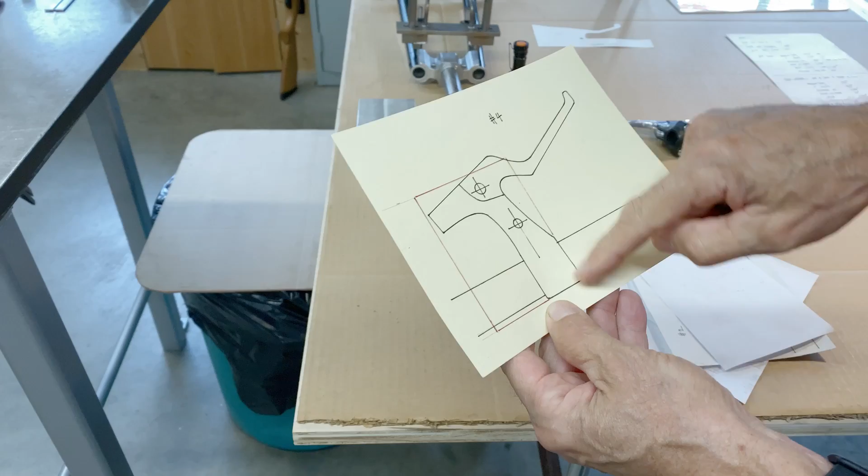I settled on number 4. If you zoom in here a little bit, you can see there are 2 parts. This is known as the perch, and this is the lever. I've got an outline in red because I've got the perch inside. So that's the size of the aluminum I'm going to be starting with. I have 2, I have to make a right and a left.

I've made lots of things, but I've never made a lever. So the first step is to make the hole that holds the bar, the handlebar. We're going to put this in the mill. First I don't want to drill down and bore into a blind hole. So what I'm going to do is go to the bandsaw and cut out a notch here, so that when I bore down, at least the chips can escape out the side at the bottom.

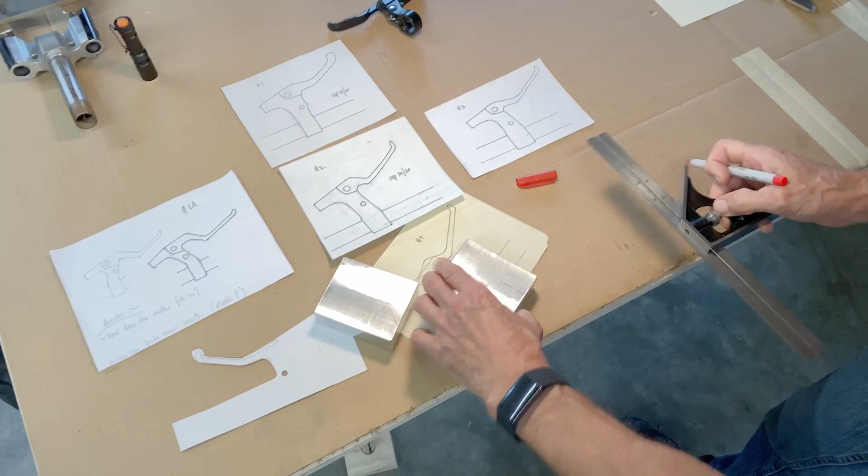That's the first step. In this process, I have to hold this. All these steps I'm going to be doing, I always have to think, how can I hold it? That's why I don't cut the shape out right away, because then I've got no way to hold it. It's always crucial, how do you hold it.

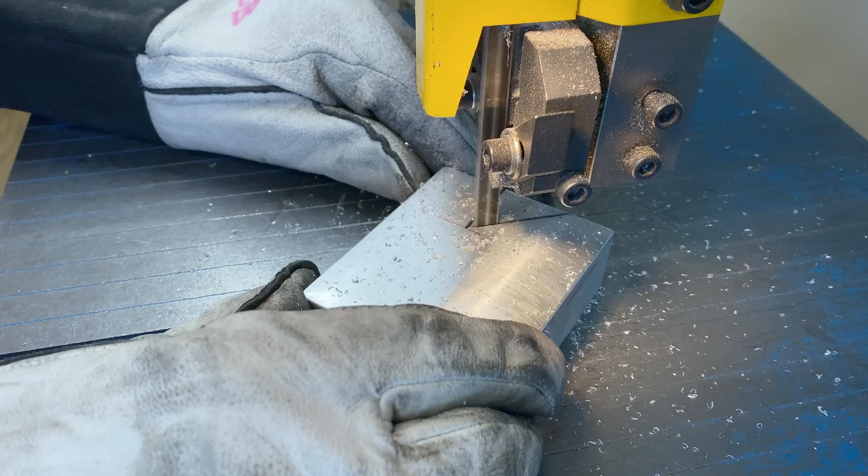In machine shop terms, okay, let's go to the bandsaw, we're going to cut those notches out. I didn't mention it, but this is 6061, and these 2 pieces of aluminum, yesterday they cost me $15.

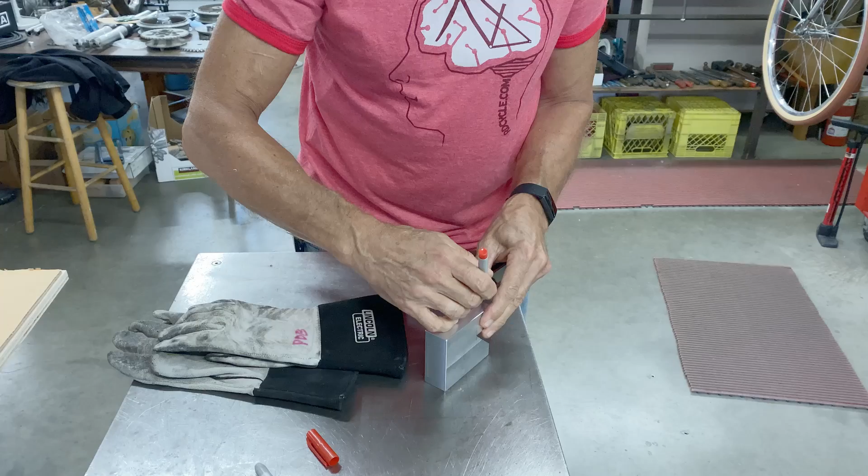I'm going to use a digital readout so I can center it, but this just lets me know how close I am, because it's always possible to make a mistake. I got a few operations to do here. So what I'm going to do is set this up in the mill vise, and locate it against this at the end of the vise, and then I can swap them out because each of these pieces is identical in size. So I can drill the hole, swap it out, I'll drill the next size hole. Then I don't have to keep changing drills as I go through, just doing one at a time.

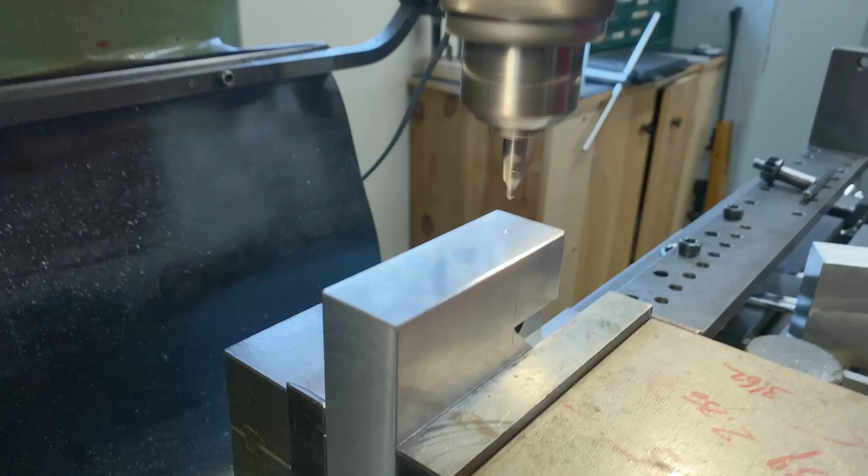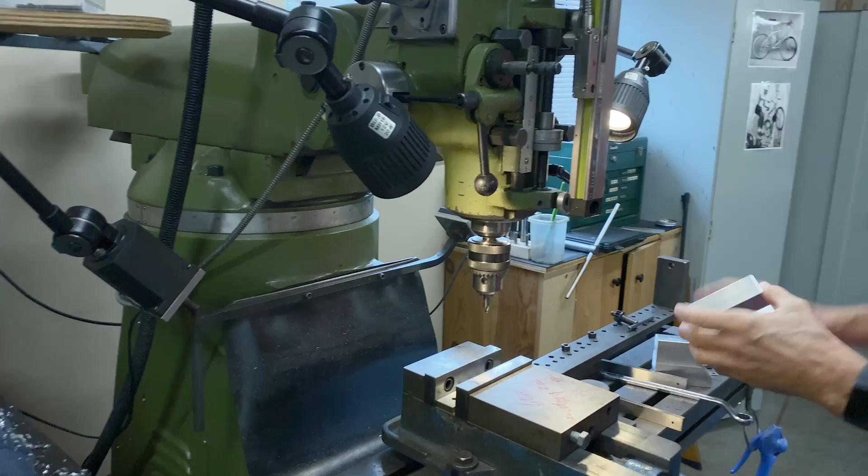Looks like it's very close, well, close to my felt pen marks. So now I can just swap parts back and forth, because when I do it like this, I know it's going to be right where the other one was.

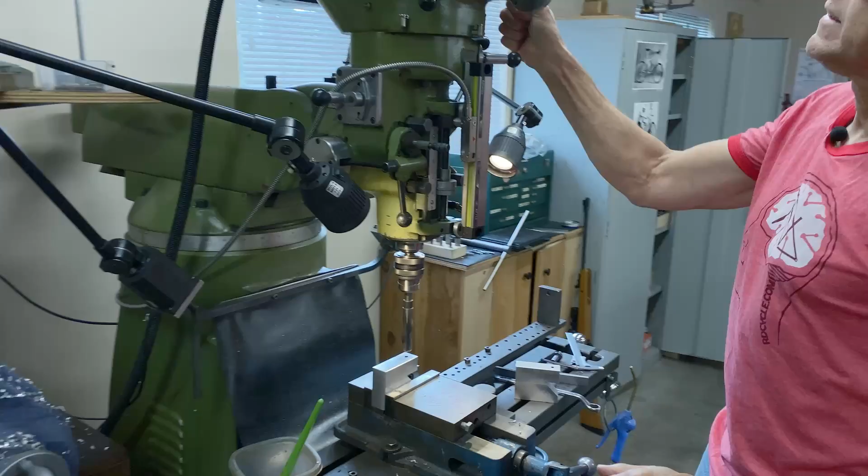We'll have to slow it down a bit because this is a larger drill. That's the rule: a small drill bit, you go very fast; a larger drill bit, you go slower. I'm going to try 800. Okay, 750, let's see what happens here. Oh yeah, that's working. There we go, that worked fine.

That's my boring bar, it's a single point tool with a carbide insert. You've got the vernier scale there, you can adjust it back and forth. That's how you set the size of the hole, because the hole has to be accurate, otherwise the handlebar won't go in, or it'll be a sloppy fit.

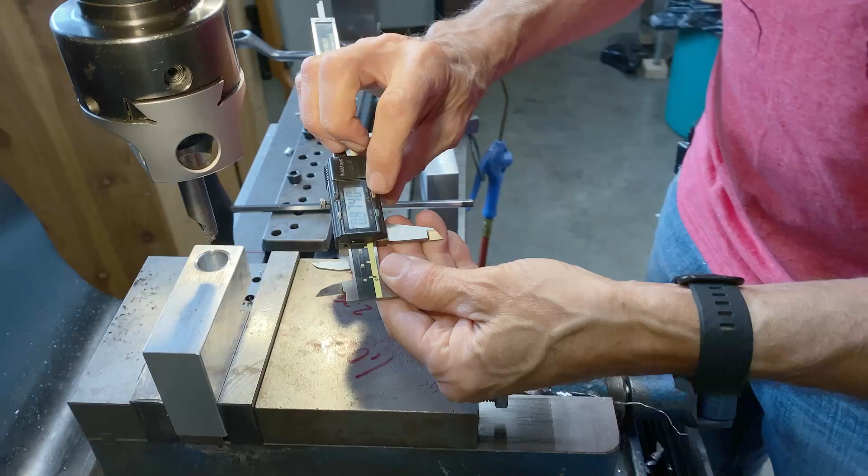Yeah, that's all I want to do. So I'm going to set my vernier to 875. There you go, 874. Zero it, and we'll see where I'm at here. Okay, so it looks like about 60 thou small, which is good. That's 30 thou, so I'm going to take a cut.

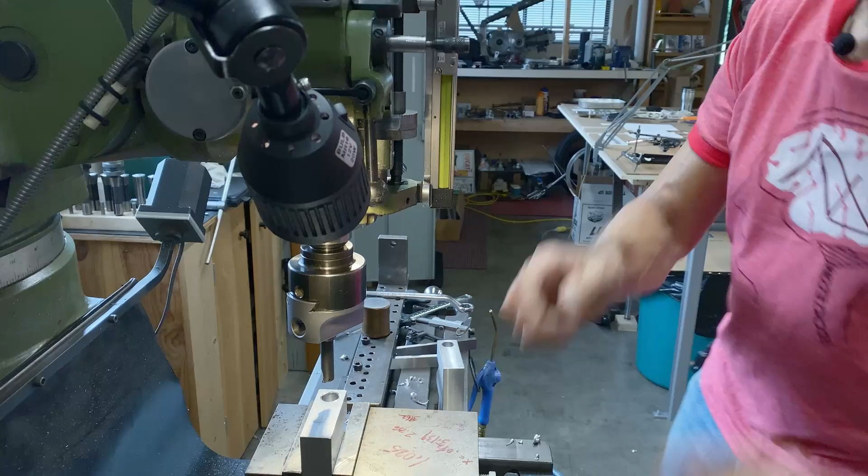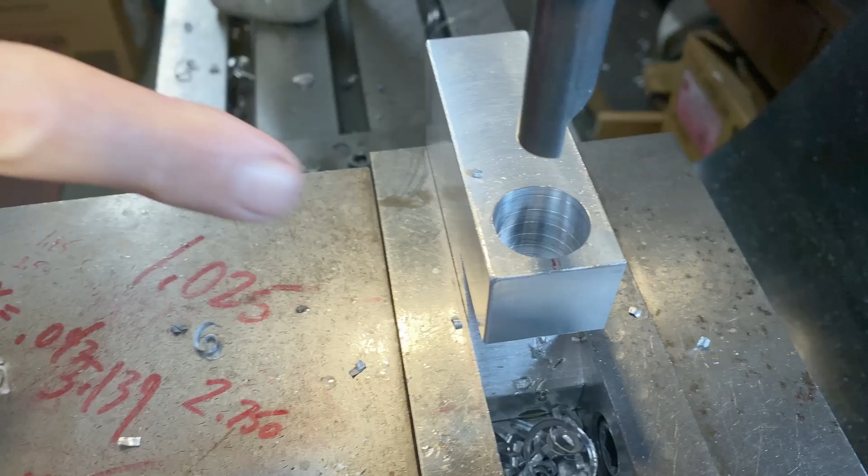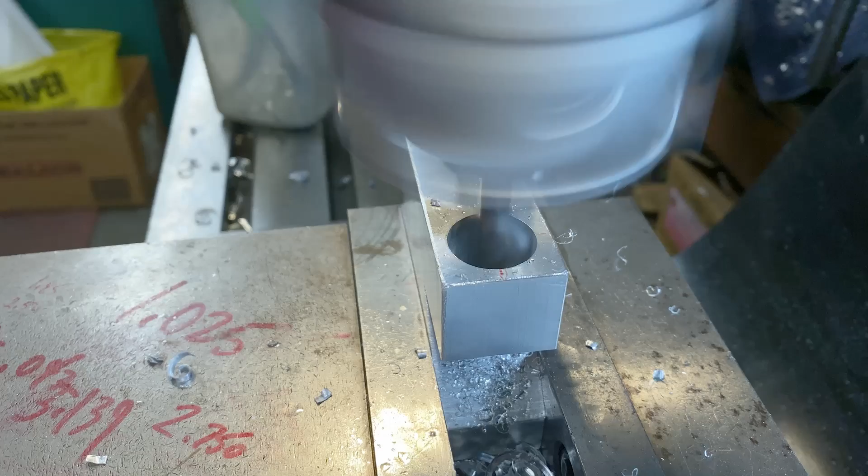Yeah, you can see the chips come through the hole. Okay, see the spiral inside there? If I take one more cut and don't move the tool, I bet it takes a couple thou out. So I'm just going to do that quickly, just taking a very small cut. So once I measure that, then I'll know how much to move my tool. It's a smoother cut now, you can see the difference, because it's taking a very small amount.

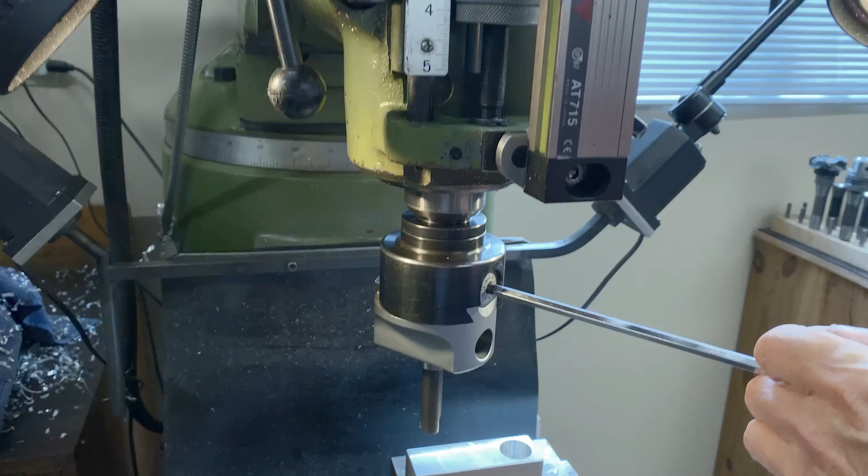I got my telescoping gauge, so I put it in, lock it, move over center, then measure. Okay, it's 853, so 22 thou, that's how much more has to come out. I'm going to go 20 because I can always take off 2 more thou. So I moved it from the 60 to the 80.

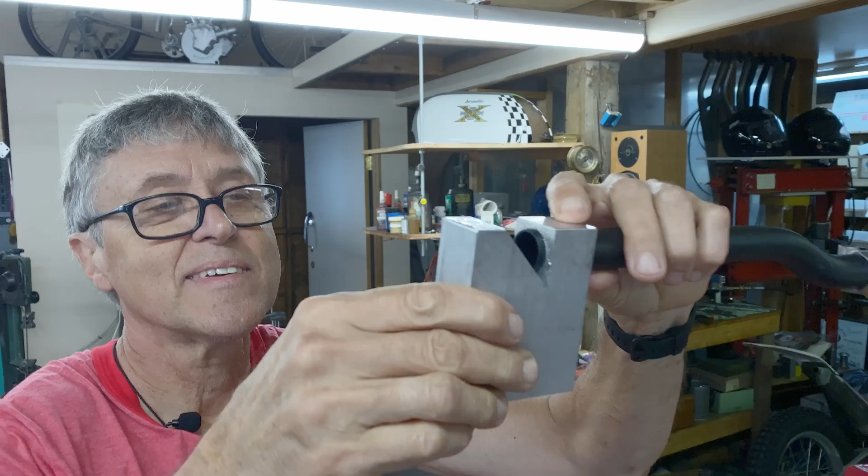It just goes on there. There you go. Maybe a little bit of slop, but that's okay. Hard to take the burr off the inside. That'll happen later.

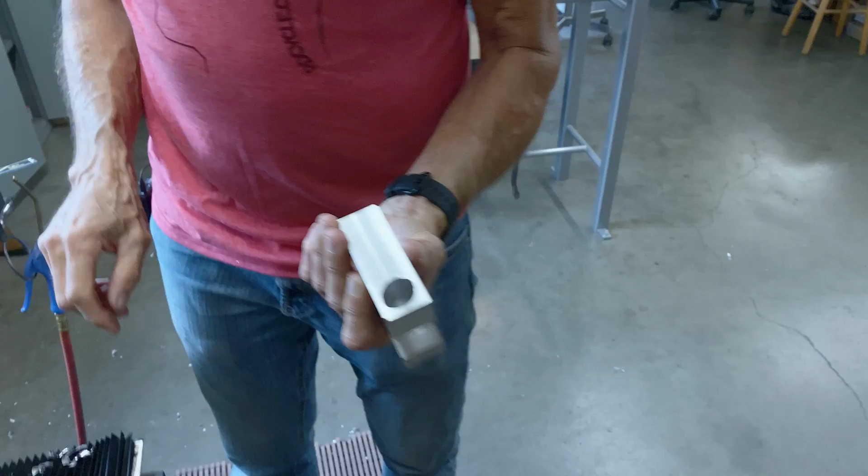Okay, so that's the first part of the operation done. I think what I want to do next is to drill and tap the hole for the adjuster screw to go in here.

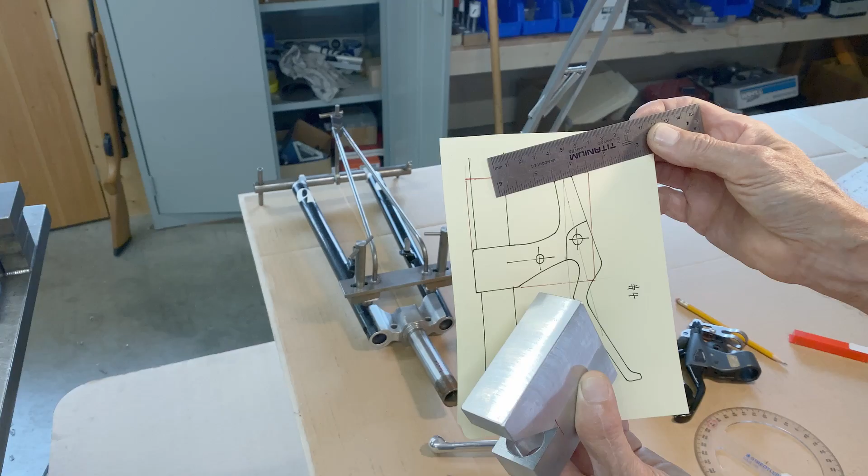There's my zero, it's 11 degrees. I've got to hold this in the vise at 11 degrees, and I got to mill a flat. That's going to be that flat right there, because I can't drill a hole if it's at an angle, because the drill wants to wander. So I have to machine that flat. So I think that's the first step, is to mark this at 11 degrees and then hold it in the vise.

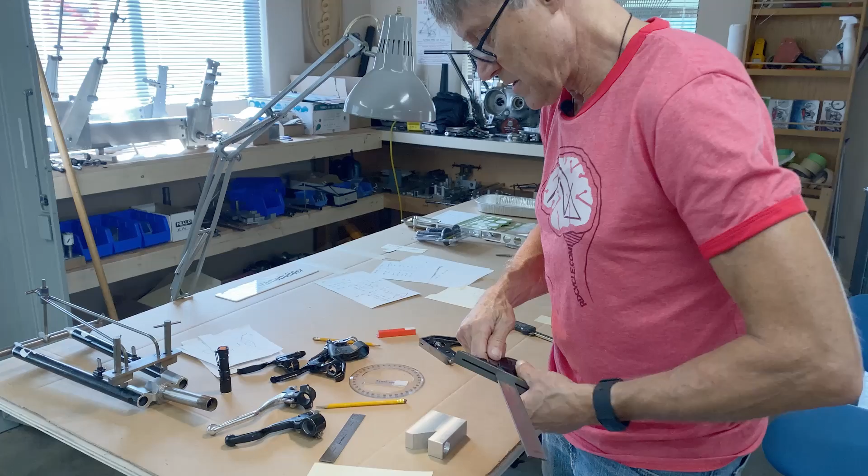Like I said, I've never made a lever before, so this is new for me. So I'm learning the process. So I'm going to eyeball it with that red felt pen.

The flat has to come past here, so that's about where I want the end mill to go to, or the cutter. So it ended up a little higher than I thought. So what you can do for that, if it ends up higher, I take a piece of flat bar. See that? I put the flat bar on top of the vise jaw, and now that lines up quite nicely.

This is my fly cutter. It's got carbide inserts, 5 of them. And I usually spin this at about 1,000 RPM, something like that.

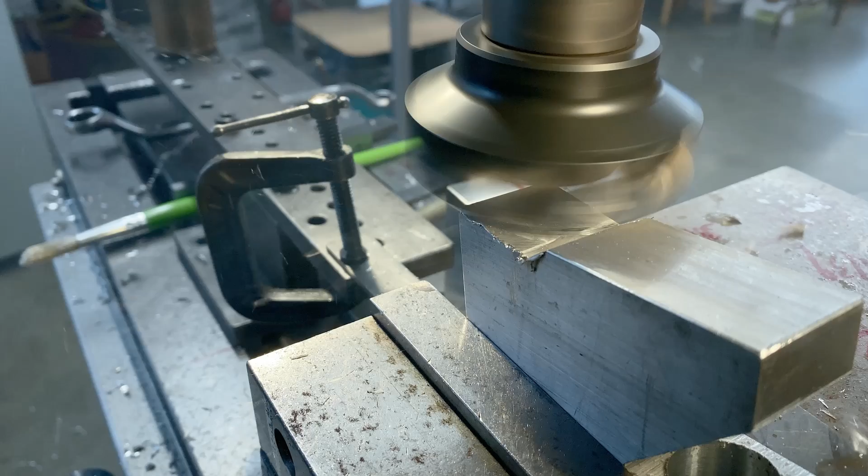So what I need to do now is, I've got the center, there's the center right there. So I need to mark the center on the piece.

All the CNC guys are probably just cringing right now. So that's my center right there. That's where I want to, I've got to drill and tap right there.

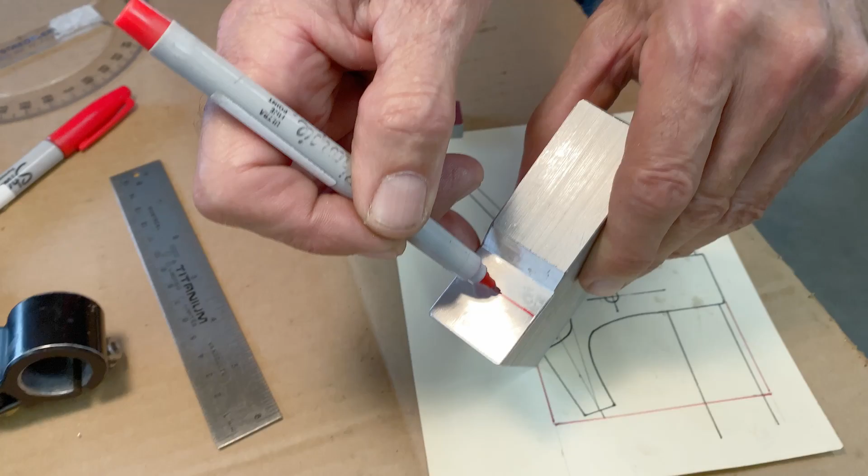It's already centered on the mill because I got my Y zeroed, so I just need to move the X so it's in line. But maybe I want to notch this out too, so I'm not going into a blind hole. So I'm going to hacksaw.

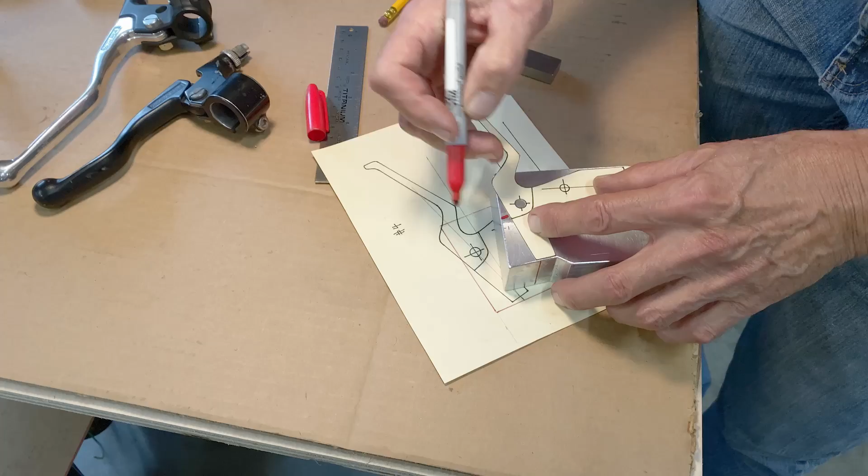There's the hole. I'm going to hacksaw like that.

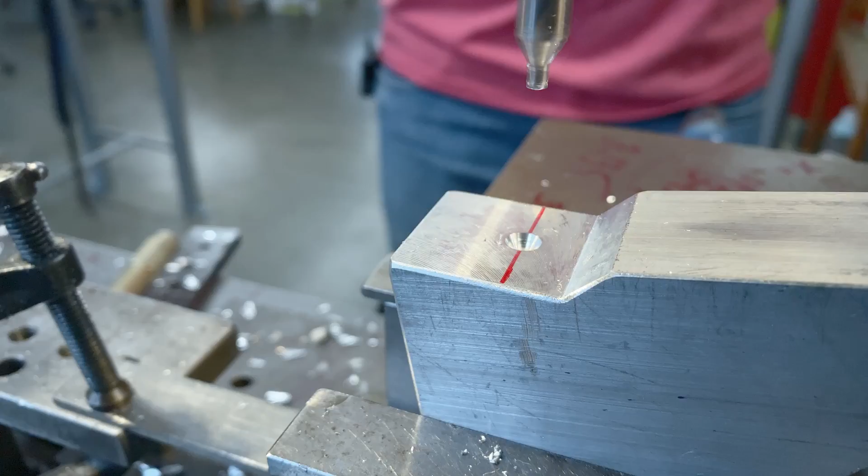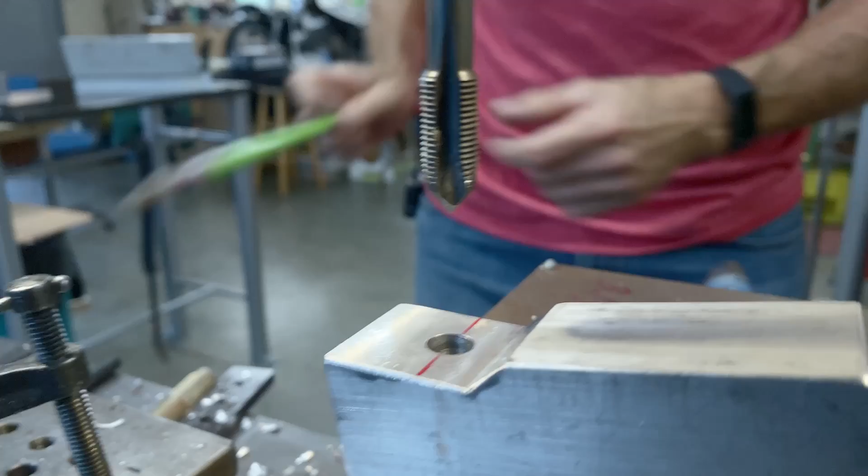There we go. So I'm going to start the tap and then I'm going to switch it off and I'll finish it by hand. There we go.

Okay, those are the chips coming out of the tap because it's a spiral point tap and it always forces the chips down. And that's another reason that I didn't want to have a blind hole, because this way I can get the tap to go all the way down and not get bound up with a whole bunch of chips.

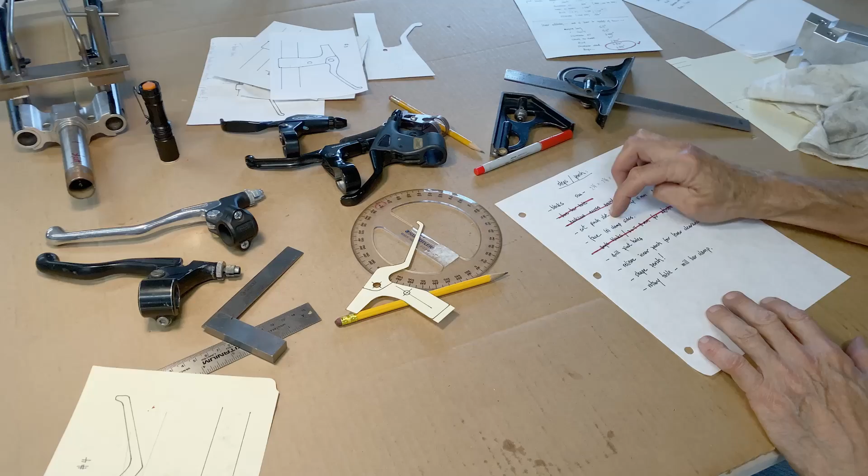There we go. I think what we'll do now is to cut the pivot, is to drill the pivot hole. I'm going to show you this.

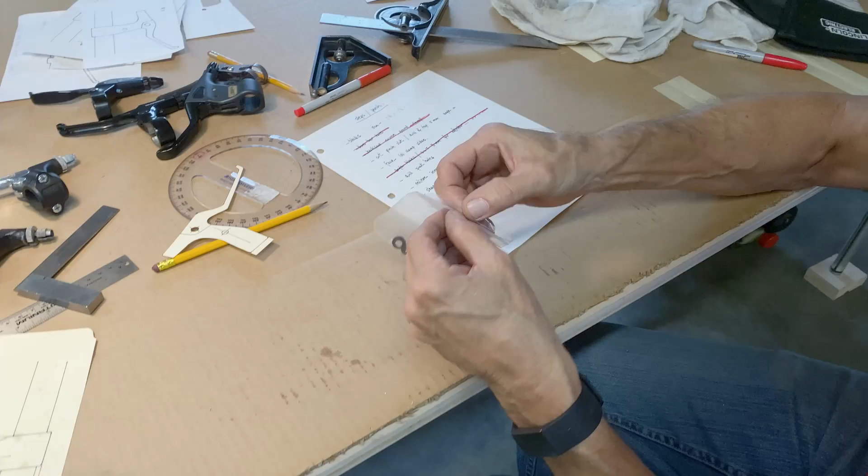I've got some little pivot, I call them bearings. It's like a little nylon bearing, and this comes out of a trials bike. This is the brake lever on a trials bike that I own, well, an old lever, and you see how the insert is pressed in.

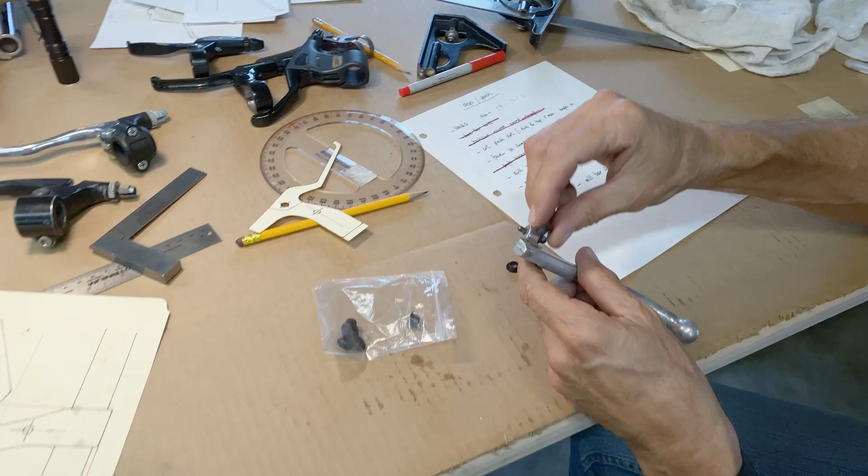So what's going to happen is these little inserts are going to go inside the perch. They're going to go on each side and get pressed in, and then there'll be a little shaft that goes into the lever. That's going to be the bearing. That's a nice little way of doing it.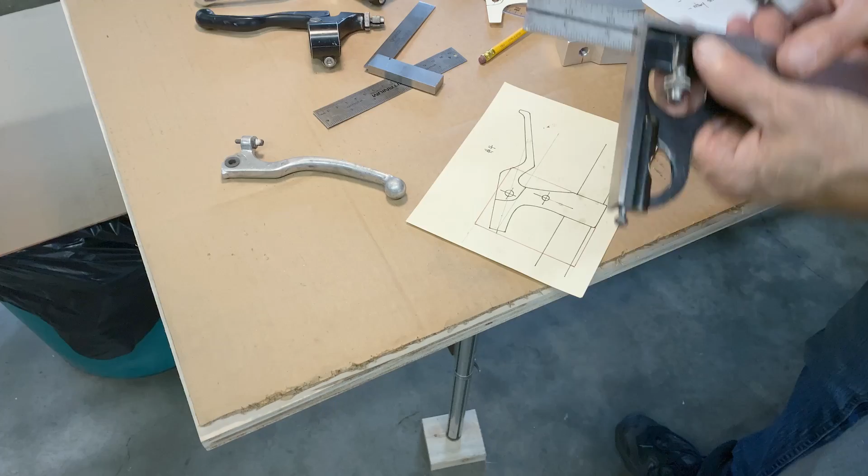So I'm going to measure off of this here, and how you set this up, I just do that. So that's going to go right about there. I just have to mark one, because after I've marked one, the other one is a no-brainer. Like that.

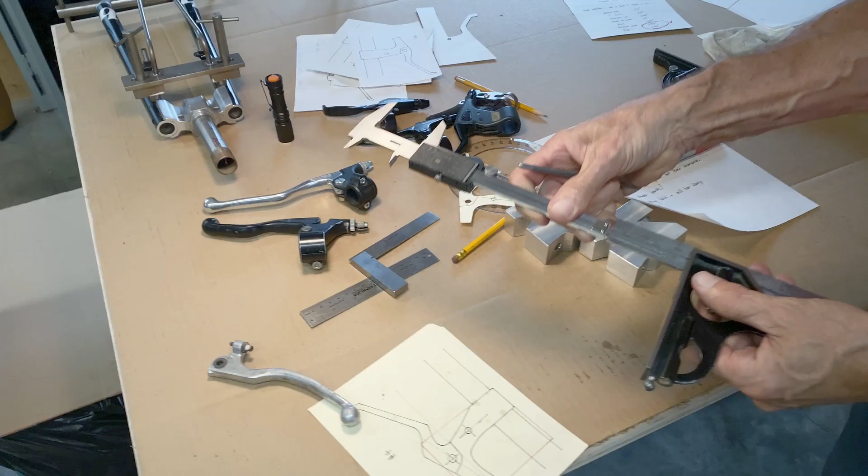That's my center on the pivot, or for the pivot. So I'll put that into the vise, I'll drill through, and then I just put in this one here, and it automatically goes to the same spot.

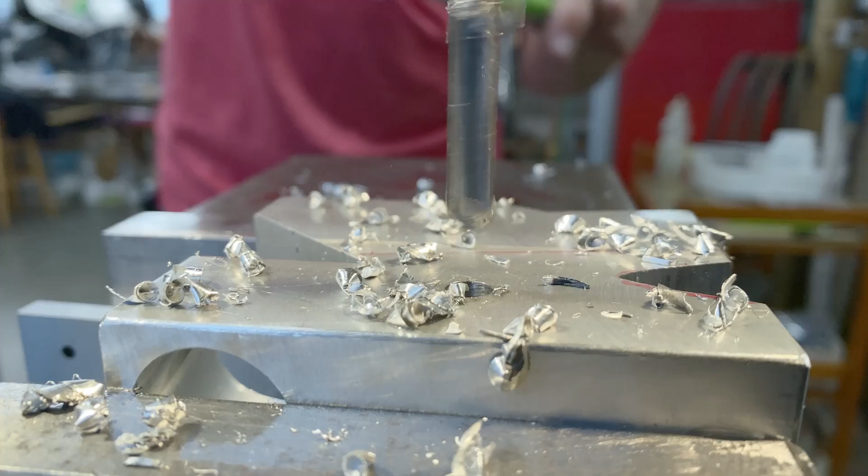So we've got to cut the slot now, and the slot you can see on these ones how it comes in at an angle. Can you see that? That's basically what I want to do.

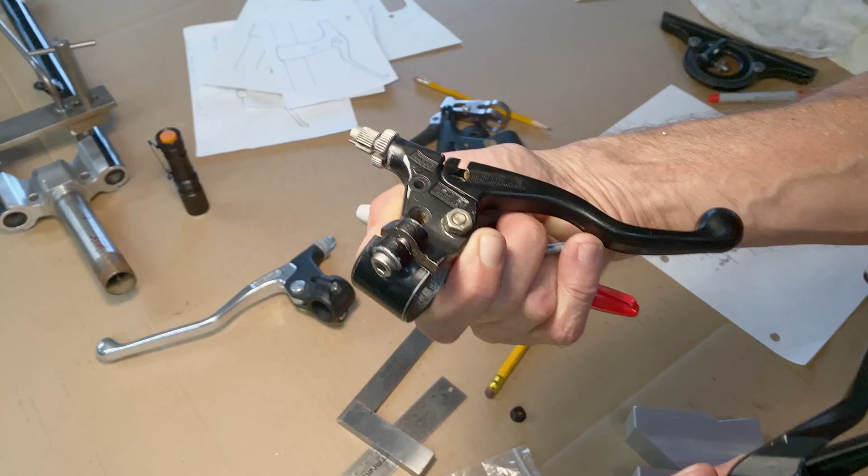I don't like the width of these slots. There's a lot of things on these levers that I don't like. I know I'm fussy. You see how wide it is there? This one is narrower, but I've got a little slotting saw that's even narrower than this. It doesn't have to be that wide. Look at that. Look how wide the motorcycle one is. It's huge. It's got to be at least 1/8 of an inch.

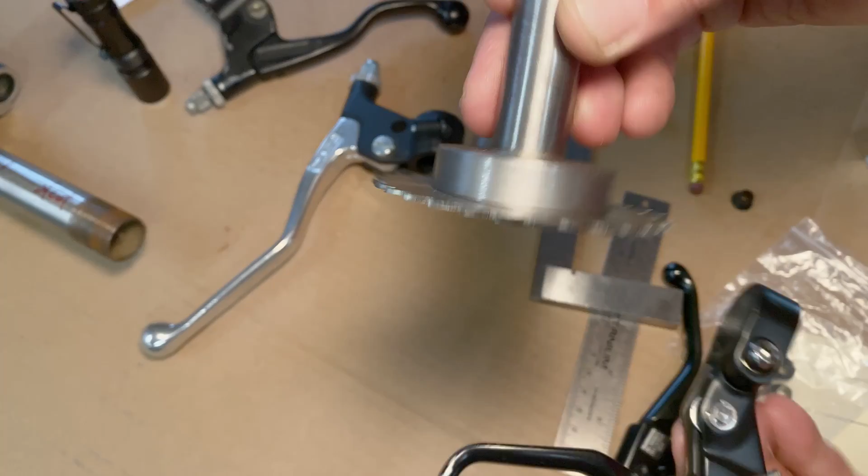So what I've got, I'm going to see if this works. See how skinny that slotting saw is? When it goes into here, it's even got a little bit of a wiggle there. So let's see, and this one's going to work quite nicely.

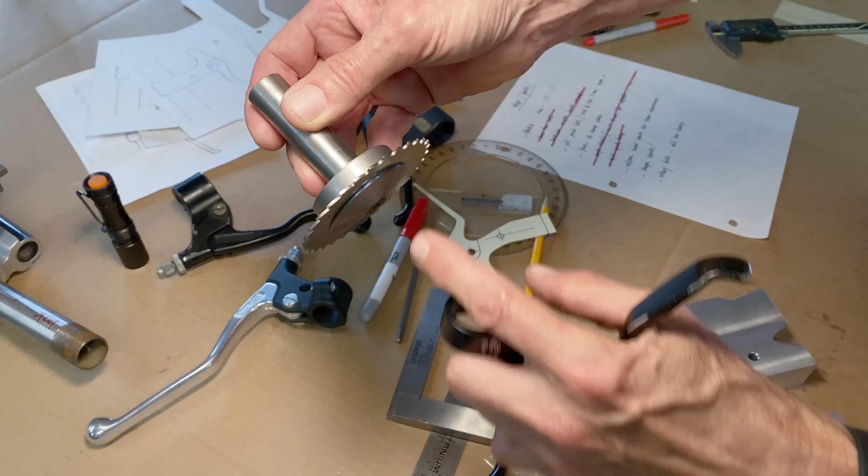This is a custom holder that I made for a job years ago. See how it goes in? You got to have space here. If you've got a big nut coming down there, it won't go in there. So this might be the trick.

I need to set this up in the mill so that I get this the right distance from the handlebar out to the center of the pinch bolt.

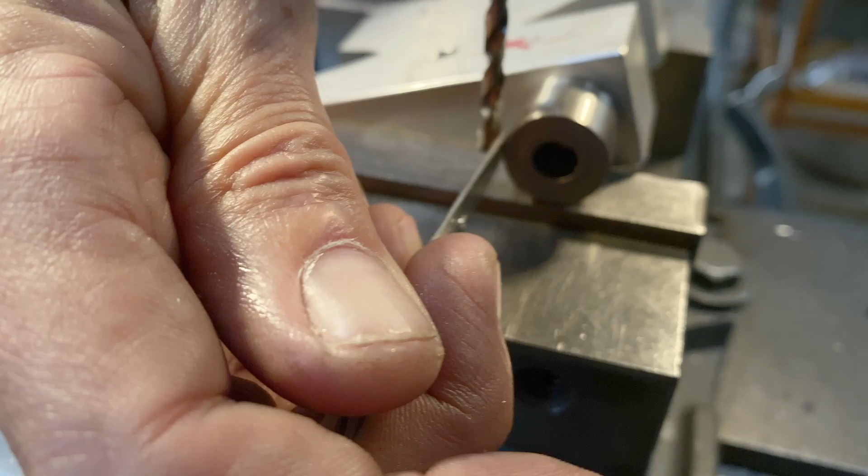So there's the center line. Okay, now I'll put this back in and show you why this piece is in there. If I put a 5mm drill in, that's the size of the Allen screw, and this is the tap drill. So if I put this in, that's what I'm looking for - I'm looking for that space. So I can make it a little less. I can move this a little bit. That'll be fine, as long as there's a little bit of clearance.

So I'm going to lock the table there. What I want to do here is only go down a little bit, and I might leave a tiny little flat on here on the low side. That shows that I haven't taken off too much.

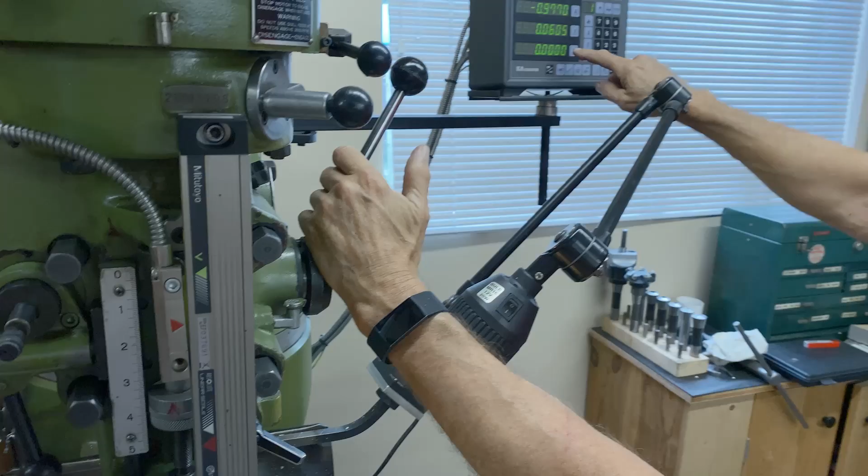You see how I left a tiny little flat there? Tiny, tiny. We have to go to the drawing and figure out how far down the tap drill is going to go. Hopefully this is all to scale pretty well - I know it's not a CAD drawing, but I think it's pretty close. So if I measure from that flat down to the red mark, I get 735. On the digital readout, I touch the drill, and then I zero the Z. This is Z - this scale here is Z.

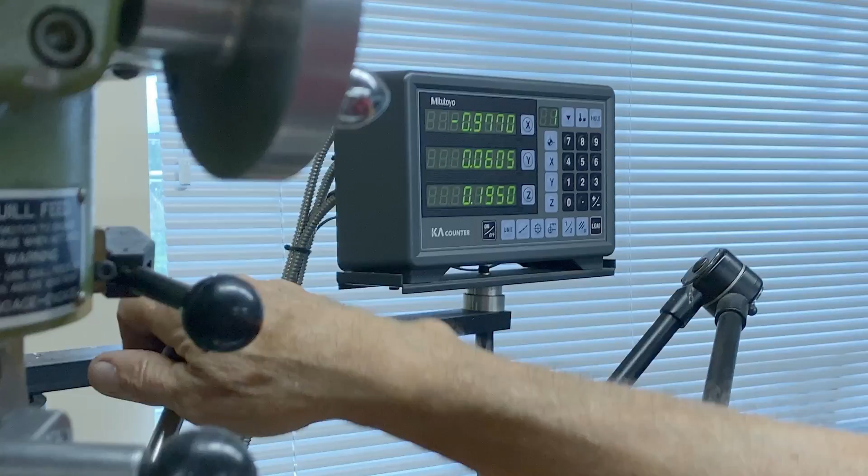735. So I'm going to swap out - I'm going to use the 5mm drill now. See how this comes down? Like that, comes down.

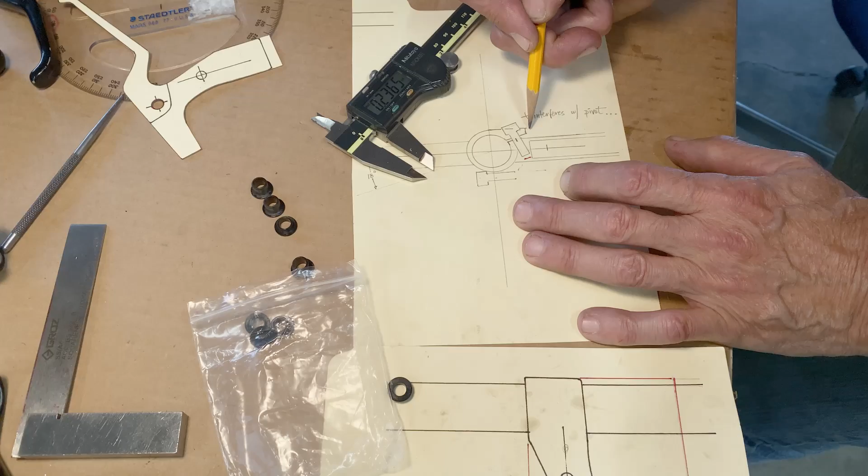So basically this one, I need to take away that metal, and I need to take away that metal, because that's how the slotting saw is going to go in there. If this is right across like that, like it is right now, that won't fit. I'm figuring out how much has to come off each side.

So 267 thou. Need to make a mark here, because this is all going to come down like so. Have to cut that off, because once I cut that off, then I can cut the slot. I can't cut the slot when all this metal's there. And then I'm going to start right about there.

So here's my zero. I zero it out right there. That's my first cut - I go around one turn, that's 100 thou.

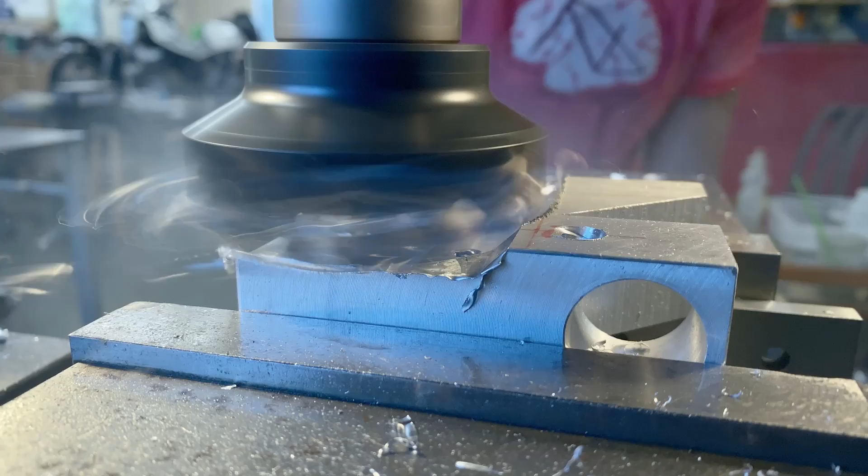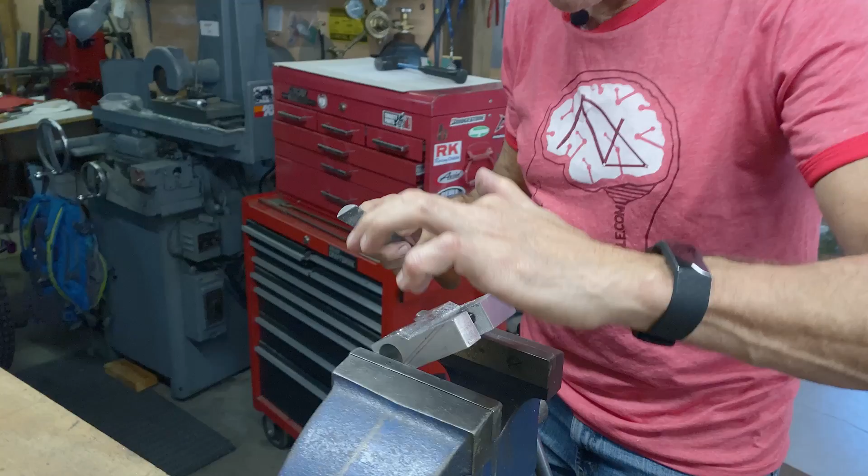So the next thing is to make a slot in there. I have to calculate how far down the slotting saw goes, because I've got to have enough material under the head of the Allen screw. I don't want too much, I don't want too little - about 1/8 of an inch might be about right.

Off my technical drawing here, say 145. So I need to go down 145, and then I've got the width of the cutter, say 45. So I need to go down 190 thou when the bottom of the cutter is level with that flat spot. See those tiny little chips there? So I would say that cutter is right where it needs to be.

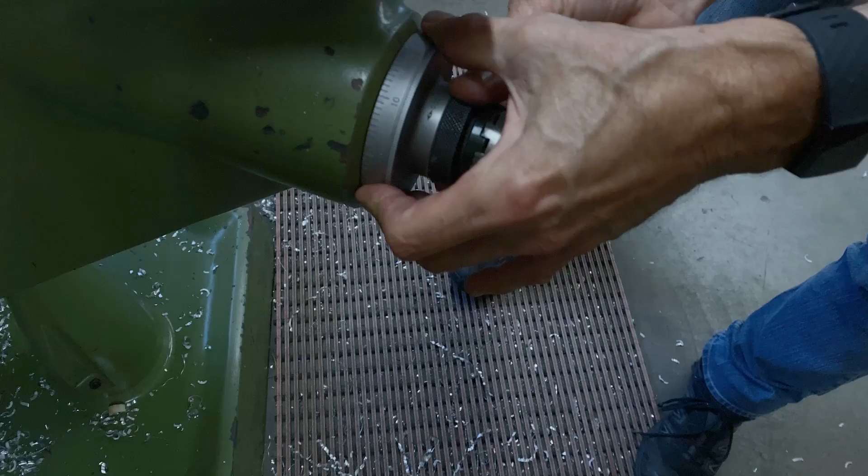So I'm going to make sure this is locked. Then I'll move this. I'll set this to 0 again. And now I'm going to move at 190. There's 100. And there's 90 - so that should be in the right spot.

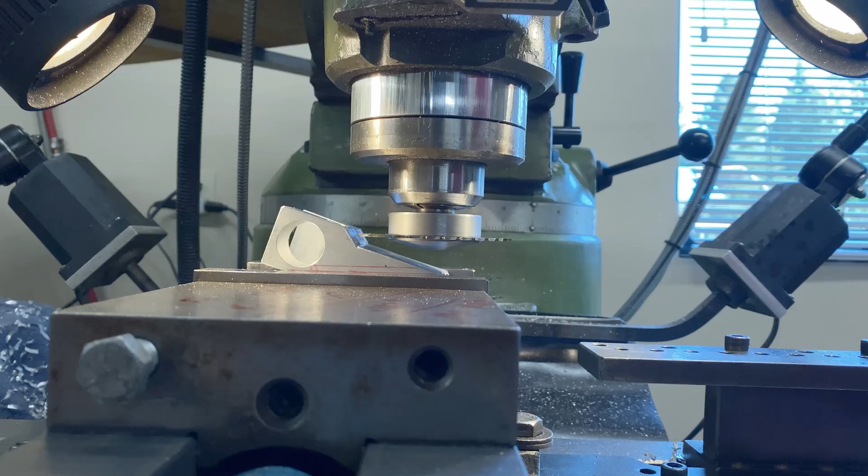See, when I'm up there, I got lots of clearance. I'm watching the space in between the cutter and the piece - I'm watching to see I don't go too close.

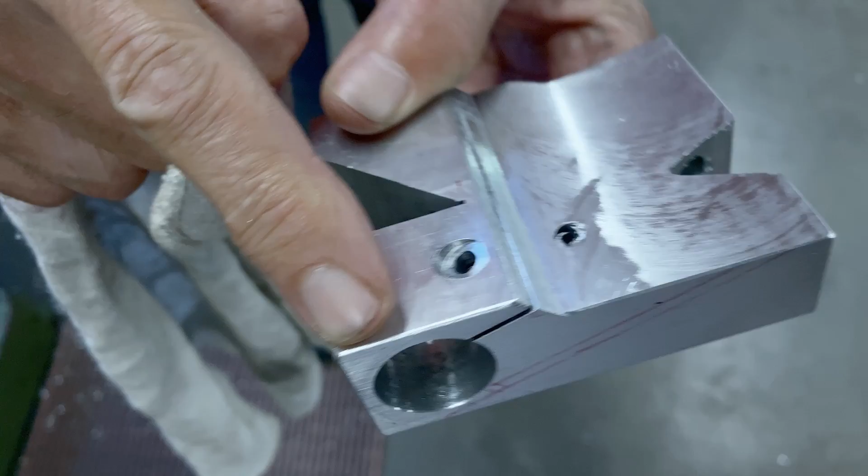So once it's out, you can see how the slot goes all the way through. It's a very small slot. I like that - and that's going to work fine.

I think the next thing I'm going to do is cut this off in the bandsaw, and then I can hollow out that, because I'm still holding it here and here, since I've got those two flats.

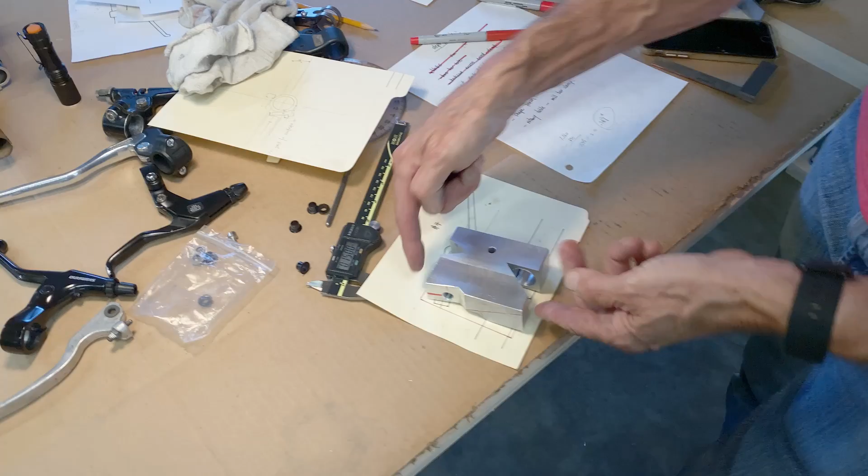Sometimes when I'm working on something and I need the shape, I'll cut it out with a pair of scissors, and then after I'm done with that, I'll put it back on the table and use masking tape on the other side, and put it back together.

And I guess I can cut this off too, but I'm going to leave a little bit extra on here, and there's a reason for that - because I want the lever and the perch to match perfectly. Okay, that's my bandsaw mark.

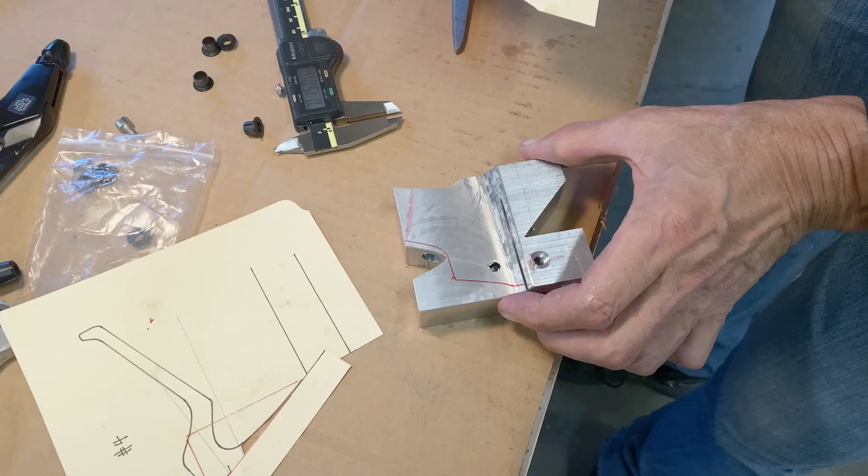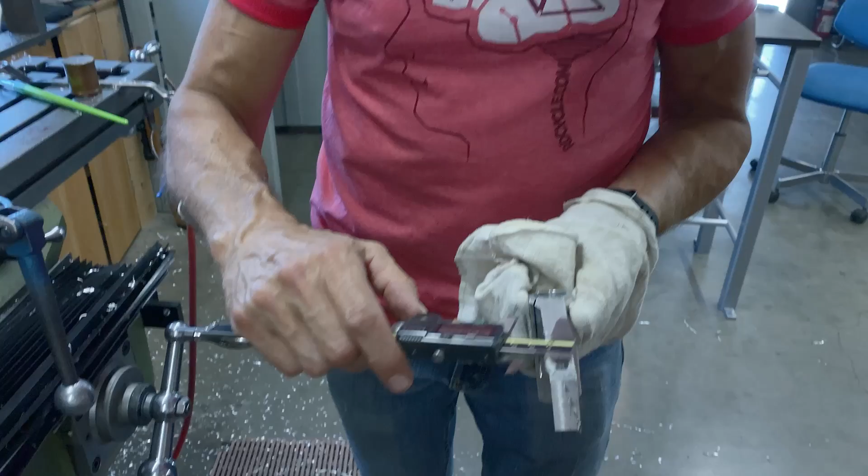So it's supposed to end up at about 5/8. Oh, 622, 5/8 is 625. So that's 3 thou under, that's the width of a thick human hair.

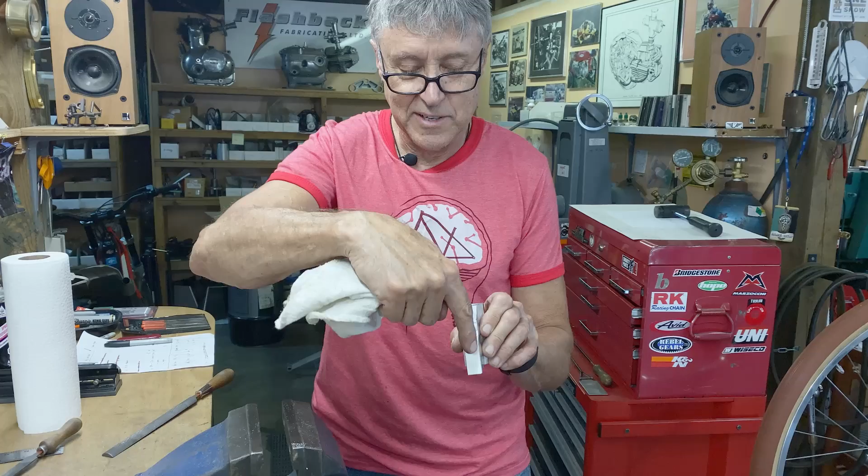I'll go with that. Next we have to make a slot in here. There has to be a slot coming through there, because that's where the lever fits into.

Okay, so now I know how far down the end mill can go, because that's going to be my edge. So that's the end mill I'm going to use. I think it's a 3/8 end mill. It's heavy, so it's carbide, and I can take a pass like so, and then move over and come back the other way.

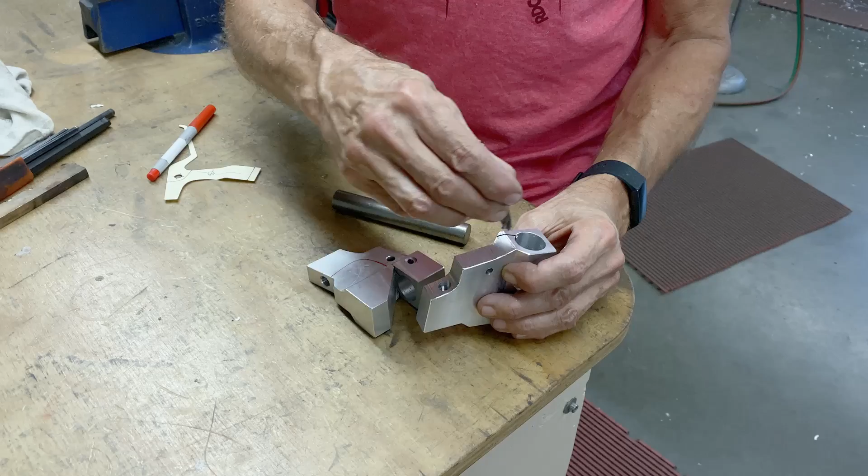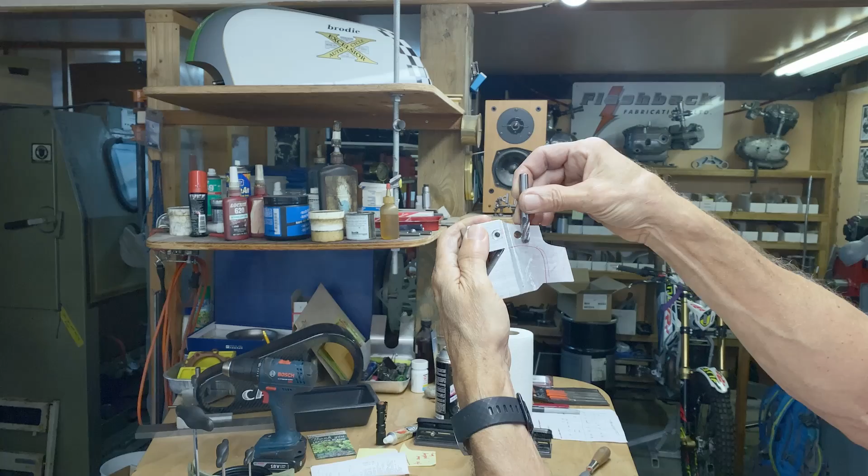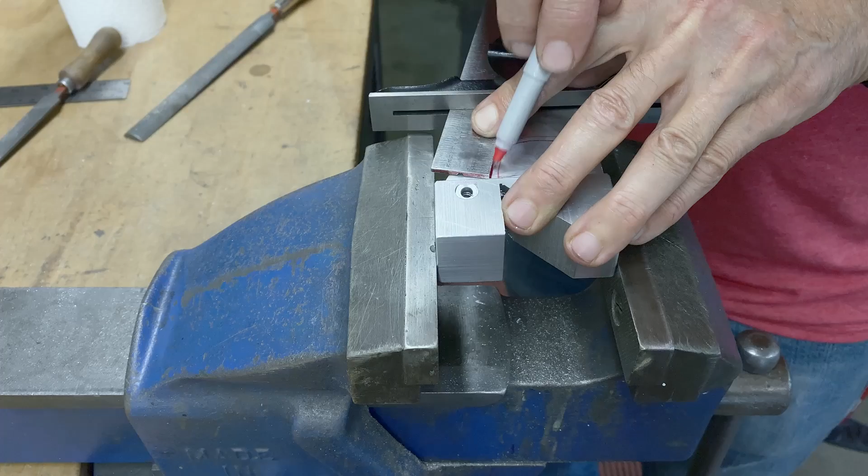So what I need to do is set up the angle here, because I'm going to hold that in the mill at about that angle, so that when I go straight across, I'm going to mark the angle and then I'll know exactly what I want. So if I set it up to that angle right there, leave myself a little bit of room so it doesn't get too thin.

That's how much, it's about 1/8 of an inch. And I can always hacksaw a little bit on the inside of this line. So that's the angle, so if I put that on top like that.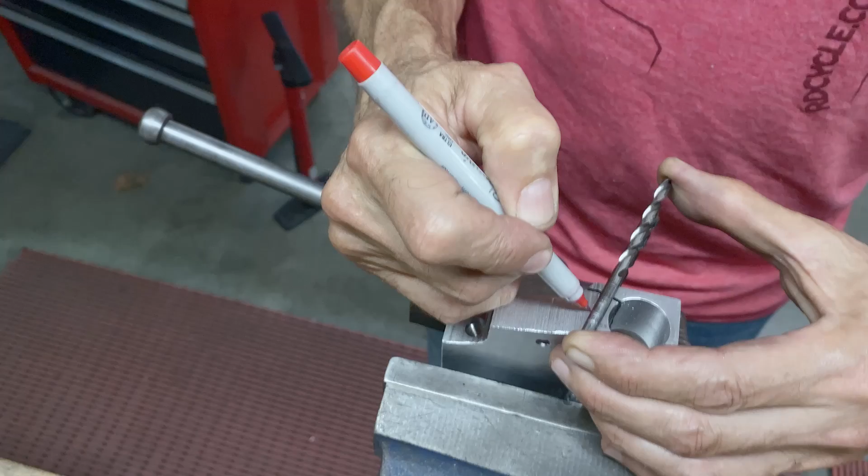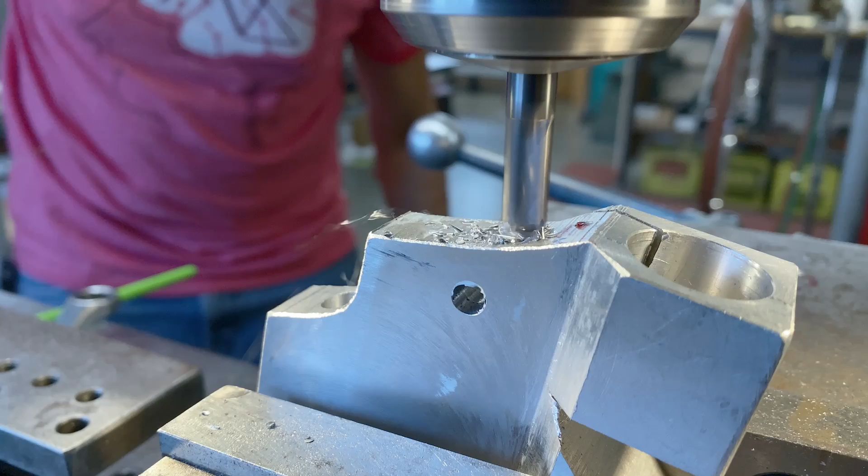A little bit of space, so that means I can go to about, if I go to about right there, that's probably fine. So that's how far I want to go right there. That's my X0.

I take one more cut down, and then I go like that. That's the pattern after that, because I need to widen the slot.

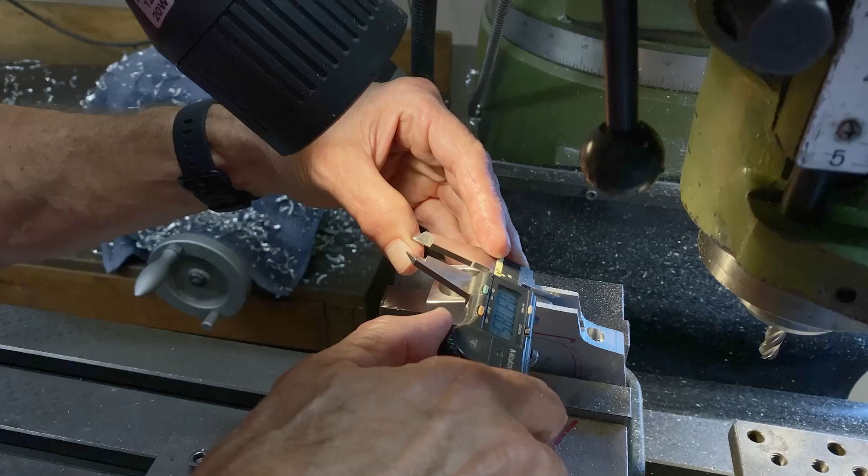So the middle is just a little bit over 3/8 of an inch. So that's enough to make a strong lever. I can go with that.

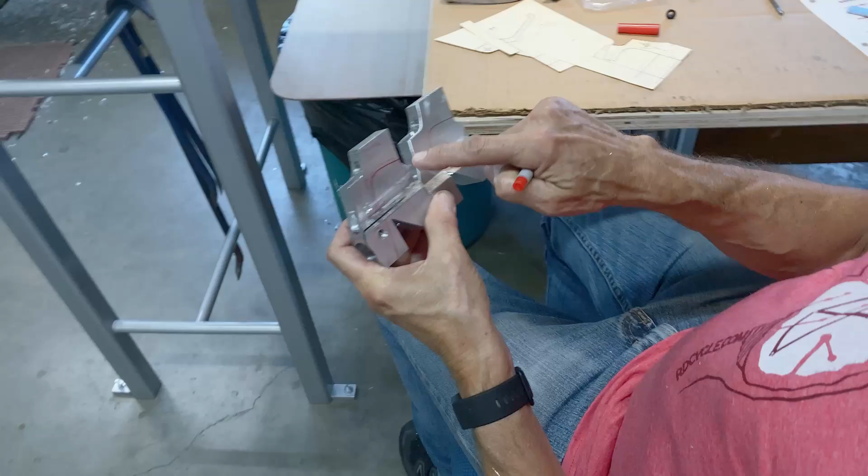If I hacksaw out this shape right now, I can still hold it here. I always need to hold it somehow.

Okay, so we're facing off the perch. Yeah, this one's smaller, huh. Now I have to redo the other side to compensate.

Okay, we'll go back to this side now. There we go.

There we go, got Anchorlube. It's a tapping compound, it works really well on aluminum. And because I got the 5mm first part, it goes naturally to its path.

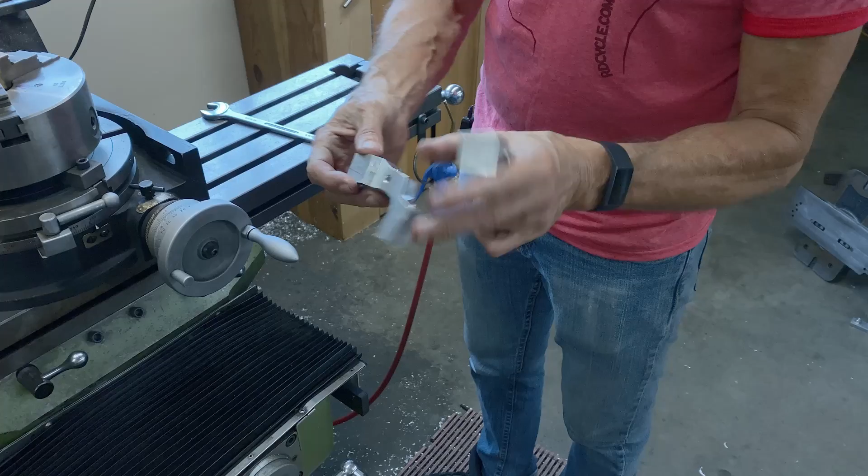This is the rotary table. I'm going to put a 1/4 inch end mill in there. We get a round 1, 2, 3 corners. This one here, I'm going to come down and we'll see how that matches up. Don't know right now.

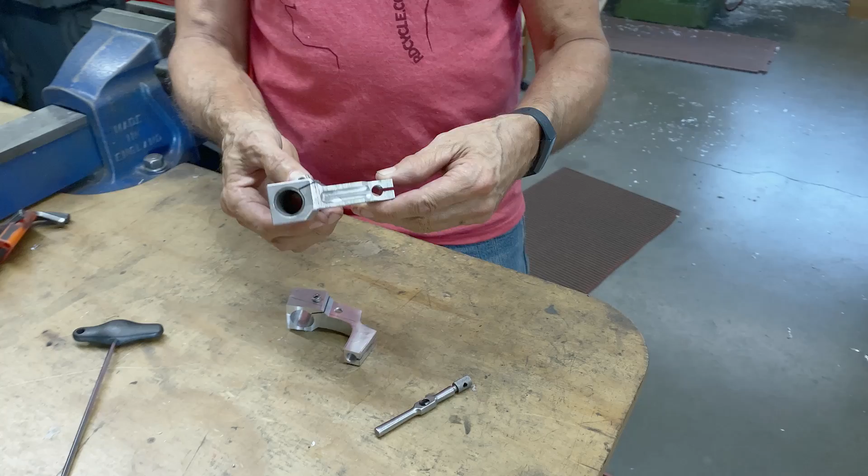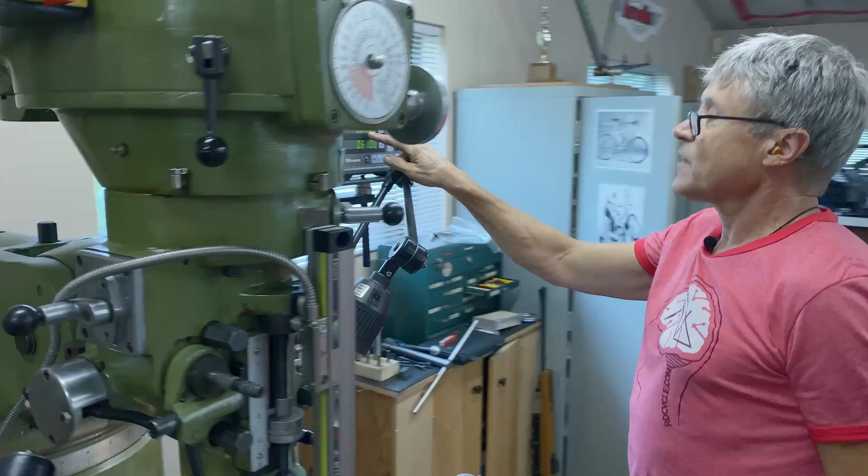Okay, let's see what happens in the chuck. So that's, I'm going to zero, I'm going to zero the Y. So that lets me know, because I can't take it all at one cut, so I need to take a couple cuts anyway. There we go, we're taking a cut.

It's going to miss a little bit, then it's going to do the next corner. And I'm not sure what's going to happen here, but we'll find out. There we go, you can see better now. Oh! Okay.

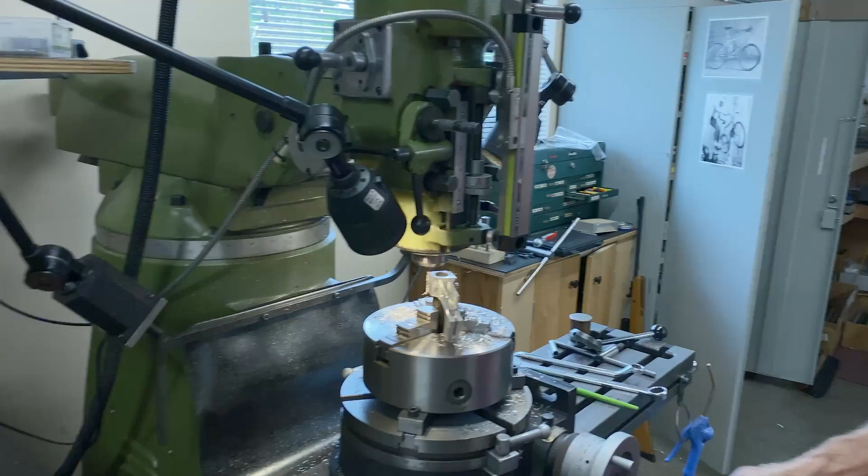So we can't take that much of a cut. Oh, I see it, I didn't lock the table. And so what happened was it grabbed and pulled the tool in. My mistake there.

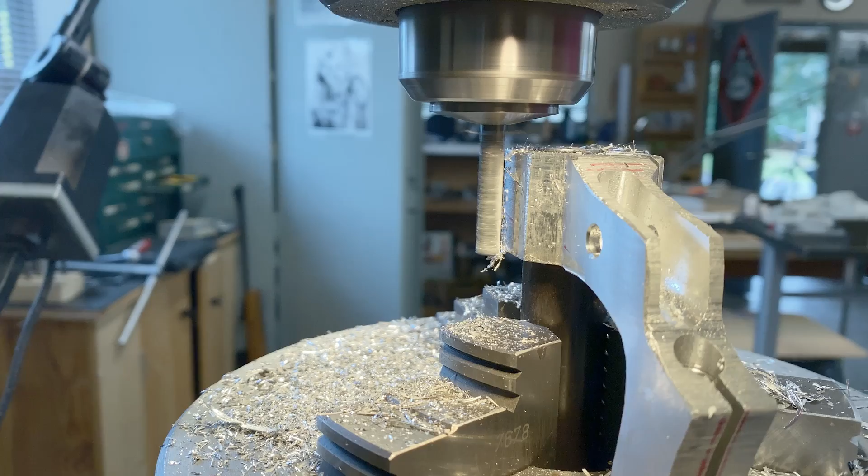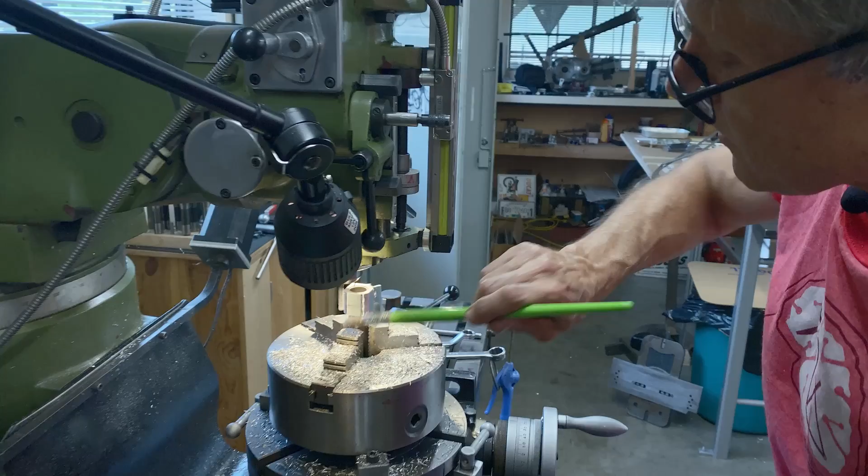So I'm going to have to be careful on this one here, see what happens, because I don't want it to gouge in. Oh, nothing happened there, okay, so we're going to move in a little bit. That's the gouge when it started to chatter. Doesn't look very good, but it's going to come out, because we got more metal to take off. And I'm going to be sure to lock the table.

So this should take out the gouge.

Okay, this one's a tricky one because I'm going to have to blend it by hand a little bit afterwards, but I want to take something off anyway. But I don't want to go too far. And I don't think I want to go more than that.

See, there's a flat spot, and there's another flat spot. So you can kind of tell how much has to come off by the width of the flat spot. So you got a larger flat spot here than here. So I have to be careful.

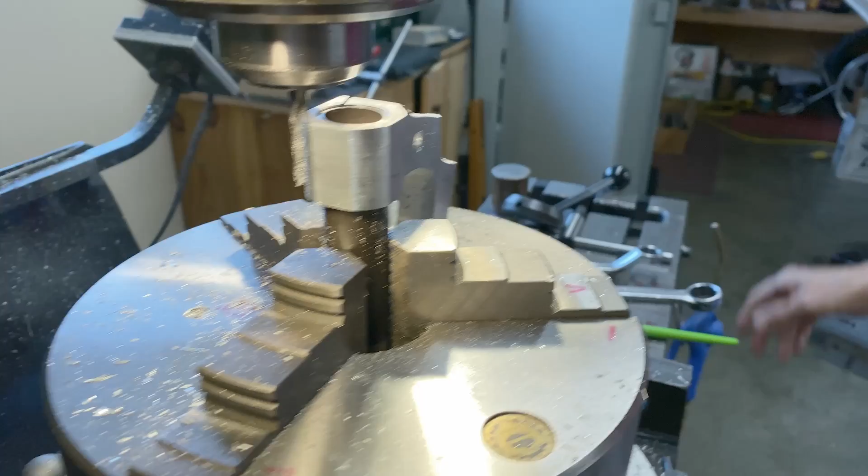This is kind of a fussy thing, so I'm going to move the tool in a little bit. Yeah, I don't think I want to go too much more there.

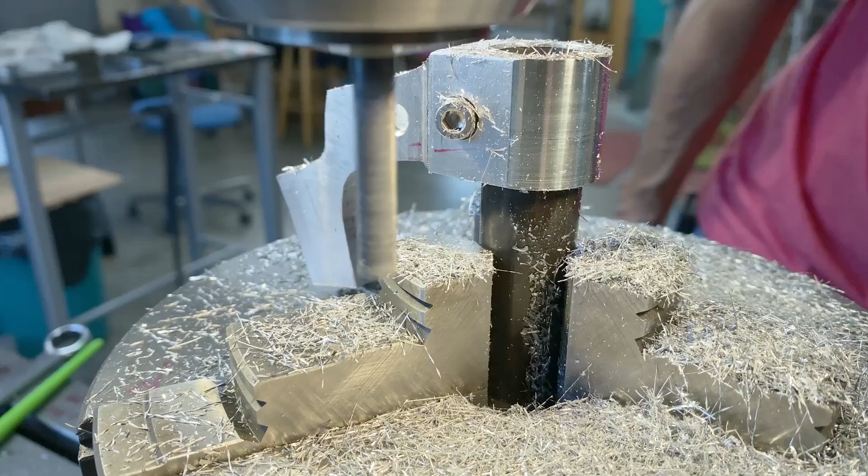I think that's as good as I can get it right now. Let's take it out and have a quick look. So that's a nice radius around there. That's going to hold the bar. You can see the shape of the lever, it's going to get radiused here, radiused on the outside.

When the lever's made, that'll be next week. When I make the lever it's going to be held in here, then it's going to get all filed. So the lever and the perch are going to match perfectly. So that's what's gone on.